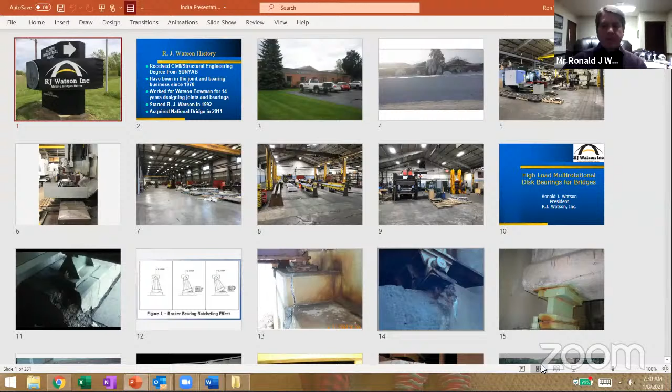Okay, there will be some initial formalities. We have academicians also with us. Here we have Professor Jyoti Busari, head of the Department of Civil Engineering in a college in Western India. Hello, hello.

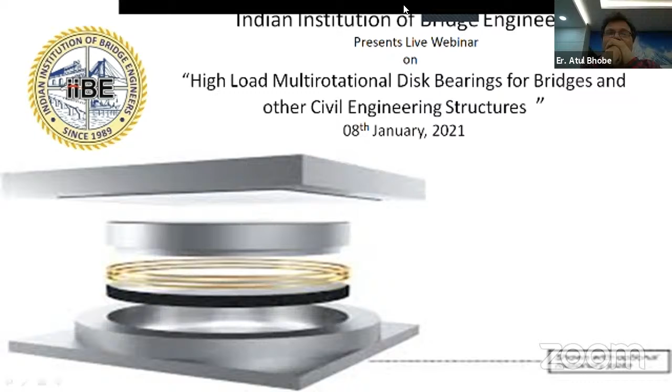Okay, well thank you very much. I appreciate the opportunity to talk to you today from Buffalo, New York, where it's early morning, and I also appreciate you staying to hear me this Friday evening. So it's a great thing.

A little bit of background: we got an upper bearing plate, and then you have a mirror finished stainless steel top plate that goes on top. So now you have a bearing that can move in any direction and also rotate in any direction. Dimpling is sometimes used - we'll use dimples and grease to reduce the friction even further, but not everybody uses dimpled and lubricated Teflon. It's kind of a mixed bag in the USA.

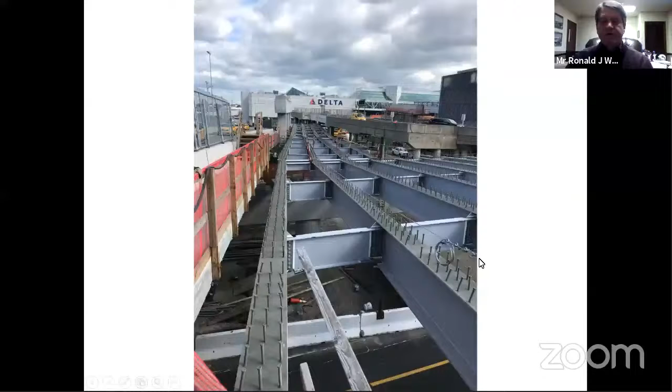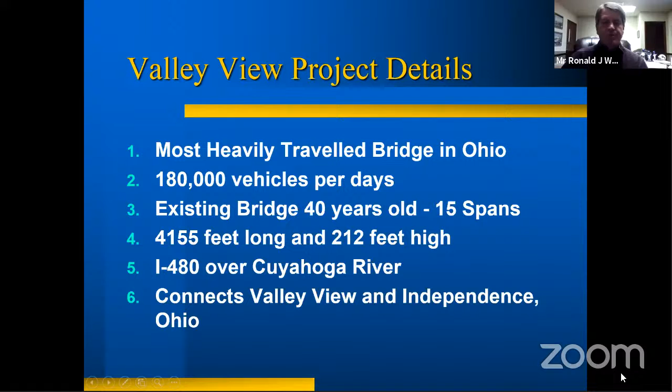This is a project in Ohio called the Valley View Bridge. It's an interesting project in that it's the most heavily traveled bridge in Ohio, getting 180,000 vehicles a day. The existing bridge is about 40 years old, actually in pretty good shape, but it's overworked with too many cars.

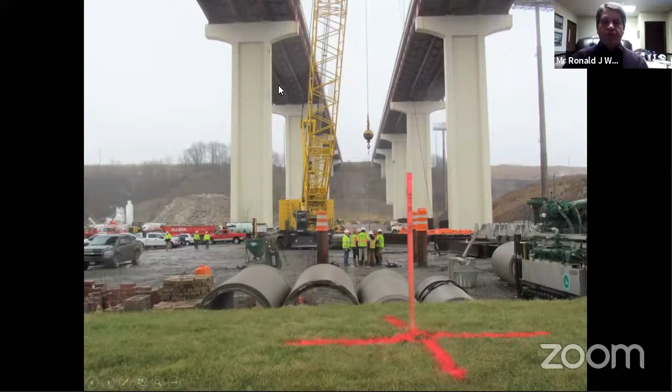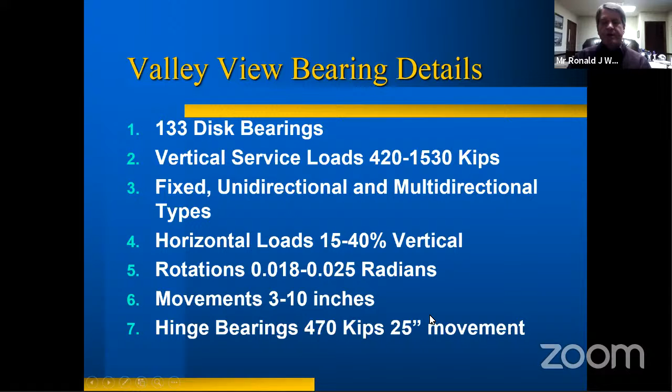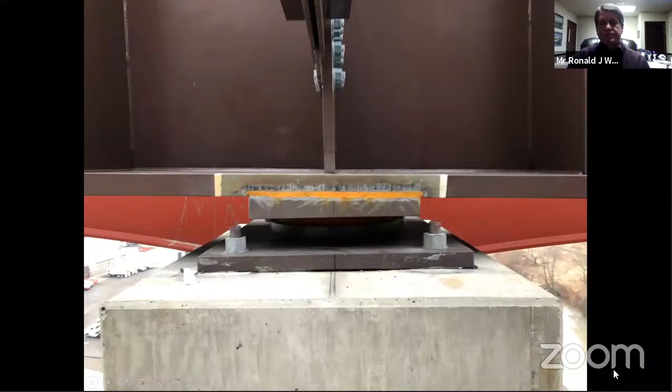So there's one of the finished installations of the bearings. We typically put an information plate on each bearing with the company name, date of manufacture, name of the bridge, and location. All the critical information is on these plates, so if you come back 10 years later doing an inspection, you can see all the critical information.

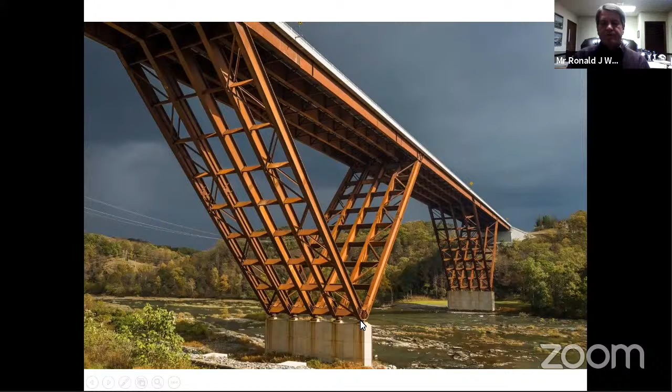They're set up on shims, in this case nuts, and then they'll grout that into place, and then their bearings are fully assembled. So for inspection it's actually quite easy, you just take a ladder, get up and look at the bearings during your biennial inspections.

Steel boxes use a lot of disc bearings. Here's a steel box bridge in Orlando, Florida, and there you can see a couple of the disc bearings supporting those steel boxes. There's another steel box application.

This is what they call a diverging diamond interchange, the latest thinking on keeping traffic flow going from divided highways, exit and on ramps. They use these diverging diamonds, which are quite popular now. These are steel boxes too.

It's interesting here when you look at this box supported by two bearings, this box supported by two bearings, and this one only has one. The engineering behind that was carefully worked out, but they determined only one bearing was needed for the interior box.

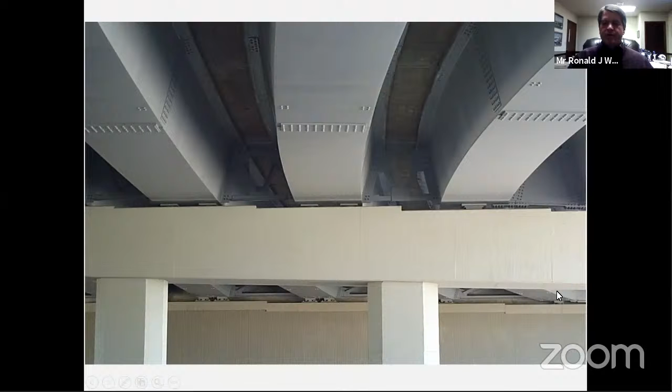Steel arches: this is a bridge in Portland, Oregon, the Sellwood Bridge, that utilized disc bearings. A little shout out to the iron workers who built this bridge.

So there's one of the bearings at the abutments, one of the disc bearings. You can see the load element. Looks like it might be a slide bearing as well.

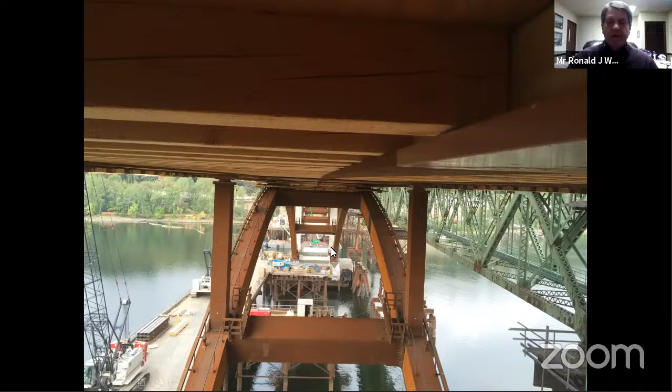Also bearings on top of the spandrel columns there. But then this bridge also had bearings between the edge of the arch rib and the shear blocks, so these are lateral bearings.

I know we're talking about using some of those on a project in India as well. There you can see a disc bearing used in the lateral direction. Interesting with this type of bearing, the load may not be on it full time; it's a design where maybe it's only loaded during wind or seismic conditions.

One of the nice features of the disc bearing is it can accommodate rotations at low or even zero load. There's no minimum load required for that bearing to accommodate rotation.

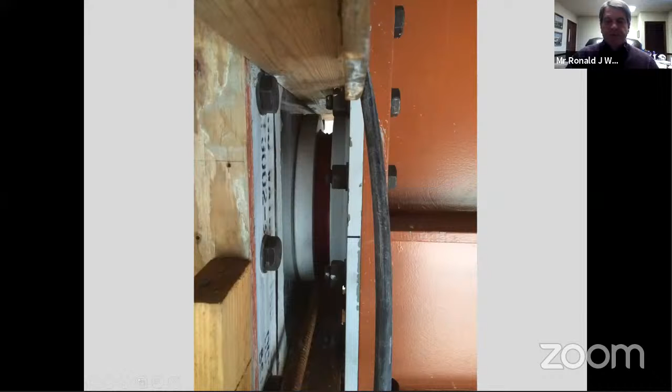This is a bridge in Arkansas, the Broadway Bridge, that sits on disc bearings. But there's also another interesting application of disc bearings on this bridge: these are the temporary struts that hold up the arch rib, and the base of that temporary strut has a little disc bearing to accommodate the rotations during the erection of the arch rib. They painted it white, so you can't really see the red disc there, but it's right there.

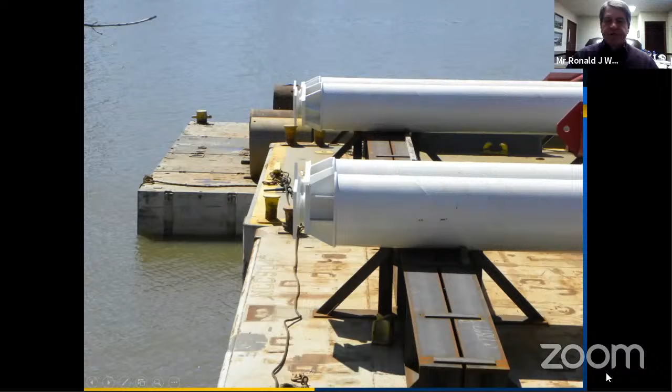This is just kind of a cool picture. It's the Rio Grande River Gorge Bridge in New Mexico, and they retrofitted the old roller bearings a few years ago with disc bearings. We also worked on the Hoover Dam project.

This isn't too far from Las Vegas. 24 disc bearings on this. This is a North American record for a concrete arch, around 320 meters span. The bearings are on top of the columns supporting the deck. Now these tall columns, some of them were like 100 meters tall, those were integral. But the shorter columns have bearings underneath, also bearings at the abutment. That's actually the rendering of the bridge. The renderings are so good now, it's hard to tell them from the real structures.

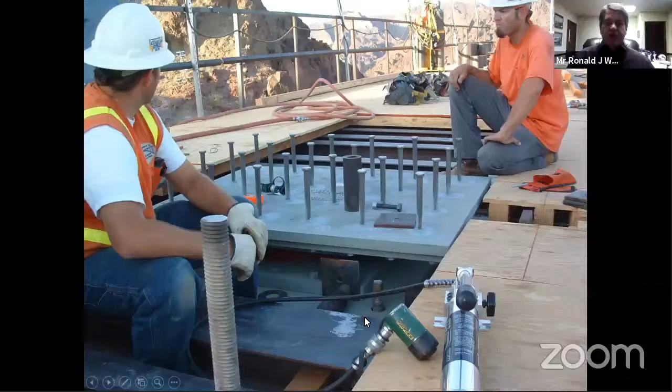Here you can see one of the bearings for the Hoover Dam project. Most of the specifications we deal with today require that the bearing have a replaceability scheme designed into it, so should something ever go wrong, you can get at it and remove it. In this case, you have a cast-in upper plate, but the upper bearing plate is bolted into that - there you can see the bolts. Similarly, the masonry plate was grouted in, but the lower bearing plate is bolted into that. So to facilitate removal, you would jack the structure, draw those bolts out, and you can actually pull the bearing out in one piece.

So that's about 300 meters over the river, which is normally a little higher than I like to go when I'm looking at bearings. A lot of these bearings are big bearings, but they're also slide bearings, so they can actually move around on you during installation, and that's not what you want to happen. So in many cases, we'll put some external angles on like this, which essentially holds the plates together. They're slotted, so you can adjust it for temperature setting. Once the final connections are made, then you would take that hardware off.

So that's the real bridge once it was completed. It's kind of an interesting structure, certainly a famous site with the Hoover Dam in the background. But if you ever go to Las Vegas, that's a good bridge to take a look at.

Cable Stay Bridge over the Willamette River in Portland, Oregon, that sits on disc bearings. Here you can see one of the disc bearings for that.

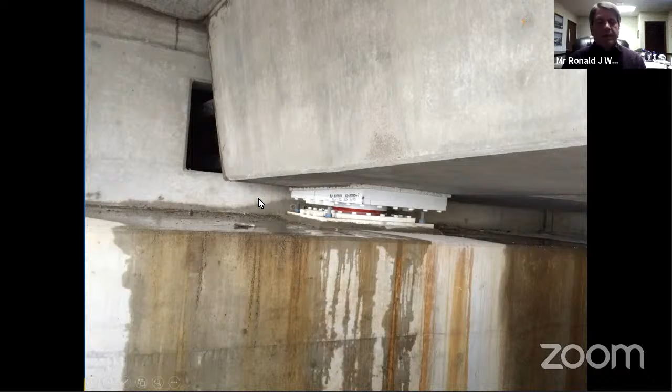This is a good picture just to emphasize a point. People often ask me, how long do these bearings last? And really, they should last the life of the structure. But what we see in the field many times is deck drainage pouring down on the bearings, and oftentimes that deck drainage, especially up in the northern states, has de-icing salts in it, which corrodes the plates. So long term, I'm not worried about the polyurethane pad, but it's the plates that can start to prematurely corrode. Now, in this case, they had not installed the joint yet, so that's why it was leaking like that. Once the joint was installed, that stopped. But in many cases, you go out and look at older bridges, you see deck drainage pouring down on the bearings. So that's something you need to deal with.

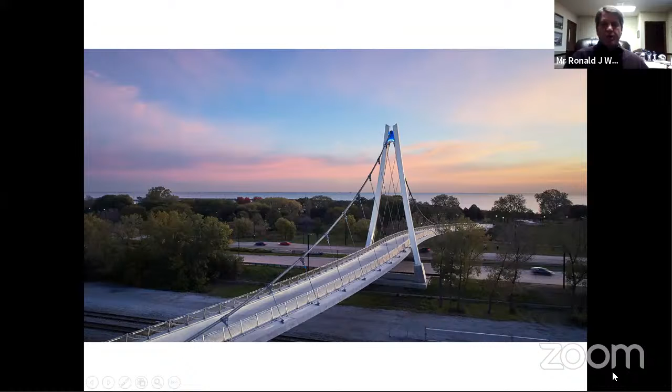A lot of pedestrian bridges use disc bearings. This is an interesting pedestrian bridge in Ohio, a cable stay bridge, and had our disc bearings also designed for uplift, which I'll talk about in a minute. This is a pedestrian bridge in Chicago, also had some uplift bearings. This is actually a bridge built for horses to cross the LA River in Los Angeles, an equestrian bridge - I haven't done too many of those. And then also another pedestrian bridge in Dallas. Pedestrian bridges are quite interesting.

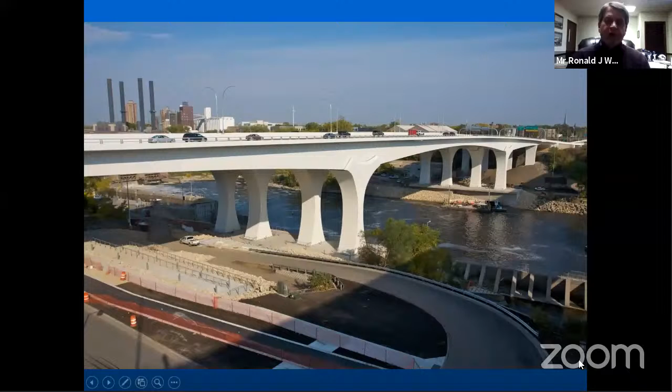This is a new bridge in Minneapolis to replace the one that collapsed, the I-35W bridge. 54 disc bearings on this concrete segmental bridge.

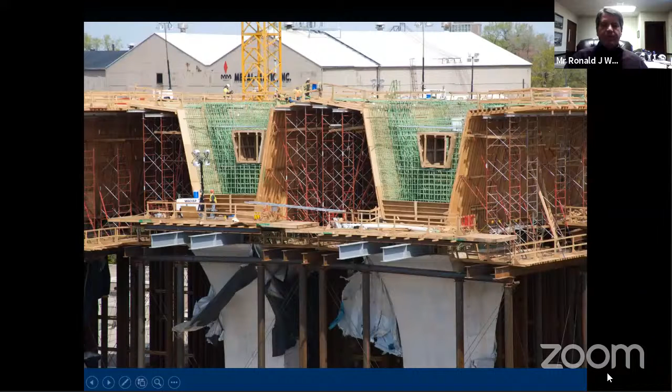It looks integral there, but there's actually a gap right here where the disc bearings are located. Some of the bearings on that were designed for 25,000 kilonewton capacity, so that's a disc for a 25,000 kilonewton load. That's the main pier where the big bearings were located. And again, here you can see that replaceability detail - bolted, accessible connections, allowing the bearing to be removed.

I often consider that a new bridge, but it's actually over 13 years old now. This was a retrofit we did - this is I-75 in Saginaw, Michigan. The original bearings were pot bearings, but they had problems with sealing ring failures on the pot bearings on this bridge, so we got the contract a few years ago to replace about 135 bearings. Some of those bearings were on the order of 35,000 kilonewton capacity, so there you can see quite a big disc bearing for that.

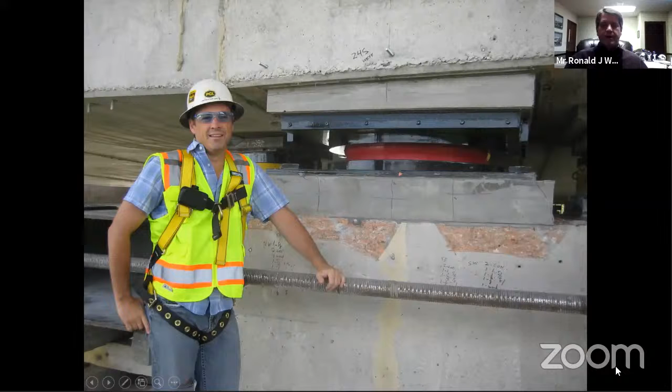Now these yellow things, you're probably wondering what those are - those are the temporary hold downs that hold the plates together. Once the final connections are made, then you take those off. The reason we paint them bright yellow is a reminder to do that. I remember I was out on a bridge once several years after the installation and the temporary hold downs were still on it, so we paint them bright yellow now as a reminder. So there you can see one of the bearings for that bridge in Michigan.

So this is an extradosed bridge. I know you have some extradosed bridges in India, but it's a cable supported bridge - instead of the big tall towers, you have the short squat towers. That's a cost effective design for certain span lengths, but it's a big, heavy concrete bridge.

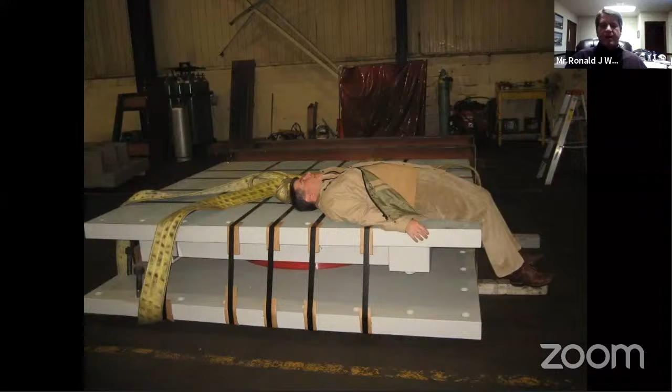Some of the bearings at the main pier were designed for 45,000 kilonewton load, which is about 1.5 meters diameter disc, maybe 200 millimeters thick - so that's a big disc. Fully assembled, each bearing weighed 21 tons. There's a picture of me laying on top of the bearing so you can see how big that bearing is. And here's a shot of us doing the installation - I was hoping all those anchor bolts lined up with those holes, which they actually did in that case.

Of course they wanted these bearings tested, and it was beyond our capacity, so we had to go to the facility at University of California at San Diego, where they have a big test frame. They can go up to maybe 60,000 kilonewtons vertical load on this machine. They have vertical actuators, horizontal actuators, and can do seismic testing. We actually tested some of our seismic isolation bearings on this facility as well too. So if you ever get to San Diego, that's a worthwhile stop. Here we are doing the testing on that big bridge in Connecticut.

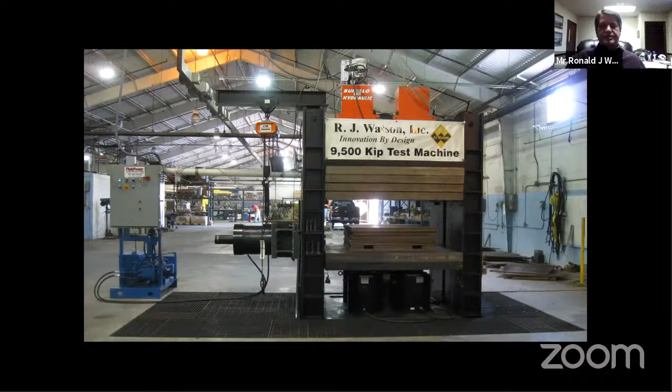Our testing capabilities are quite good - we can go up to about 40,000 kilonewtons vertical load on our big test frame. We have a horizontal actuator to do friction testing and horizontal load testing, so we keep this machine pretty busy. We have a large displacement actuator that can do plus or minus 650 millimeters of displacement, so if you're looking for some large displacement testing, we have that capability. Here's our large displacement test frame - you can see how that would operate.

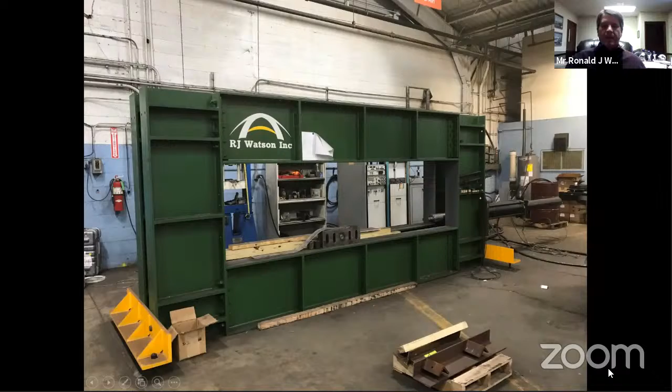And then a smaller test frame - this maybe goes up to on the order of 15,000 kilonewtons, somewhere in that range. Smaller bearings are tested on this as well too. We have extensive testing capabilities - we test other people's bearings, we test bearings for different industries as well too. So if you're looking for some high capacity testing, we have that capability as well too.

Uplift is something we see pop up quite a bit nowadays. Uplift is common in seismic zones because earthquakes don't just go back and forth, they go up and down as well. Sometimes on a curved girder, you might see an uplift reaction during certain conditions. But one that pops up quite a bit now is flood-prone regions - we saw that during some of our hurricanes in the south where sections of highways floated away. You don't think of bridges being buoyant, but they can be, so that's another application for uplift. We modify the SRM, or central pin, to make it almost like a trailer hitch on your automobile.

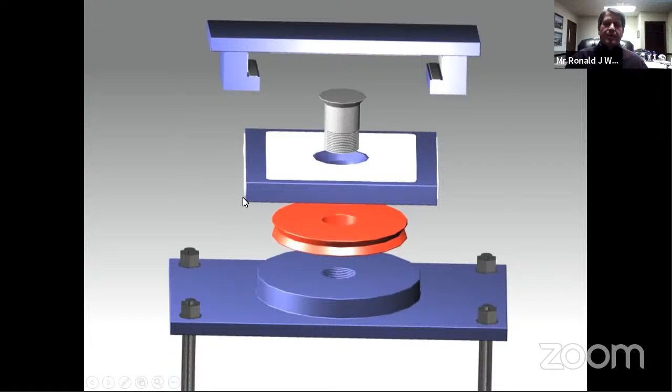It allows rotation but keeps the plates from pulling apart. We connect the upper and lower bearing plate through that. Then if you want movement, the guide bar would lip underneath the upper bearing plate. So fully assembled, this bearing looks like this. It can move and rotate and resist uplift. We do a lot of bridges, but actually buildings use uplift disc bearings as well too.

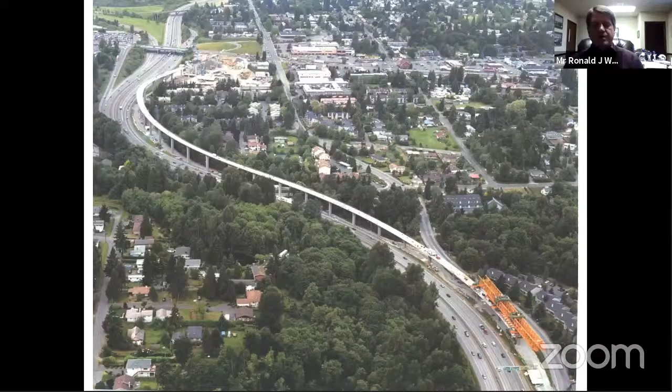This is a project in Seattle, part of their light rail system. We do a lot of light rail structures as well too. This is called Sound Transit near the airport, precast segmental design. Here you can see the uplift bearings for that project.

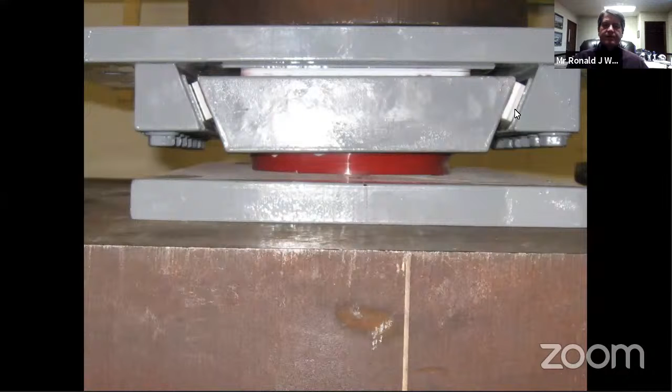Another project in New York City, this is a case where they were replacing old girders nights and weekends to keep the trains running during rush hour. There's a little hinge detail here. The problem is we had a very limited height to work with, so instead of the conventional guide bar underneath the upper bearing plate, we used a wedge plate detail like that. That enabled us to achieve uplift in a much lower profile. So we do a lot of specialty designs like this.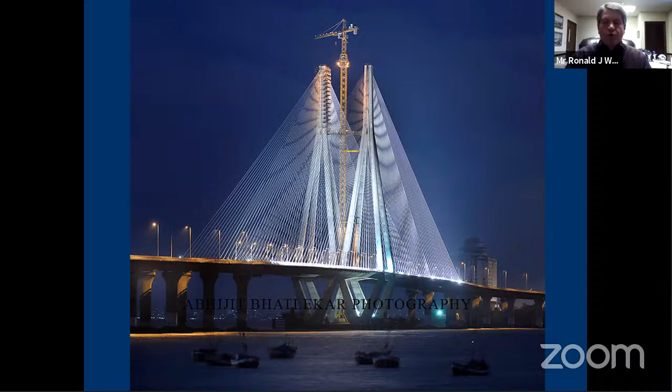Of course, we've done a lot of international projects, especially some in India as well too. This is the Bandra-Worli Sea Link Bridge in Mumbai, and disc bearings were used on that project. There's a picture of the bearing with the protective coating on it in the shop, in Metco's shop. There's a picture, you can see the big concrete segment being supported by disc bearings on that. So that was a fun project to work on.

Also, the second Vivekananda Bridge - this is an extradosed bridge, we talked about that a little earlier, again cable supported with short towers. So that had disc bearings on it, and Atish was kind enough to send me this picture. He reported that they've done recent inspections and the disc bearings are performing well.

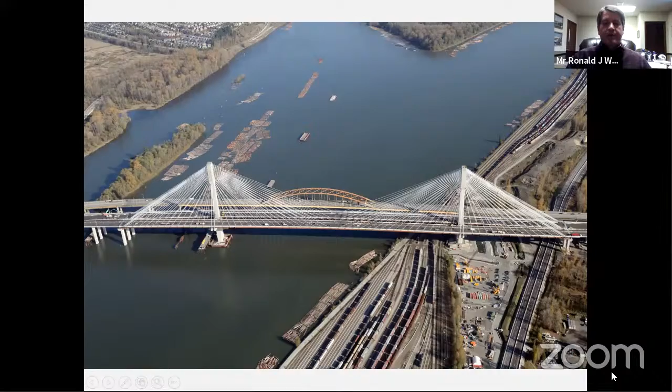This is another project up in Canada - the Port Mann Bridge, cable stay bridge in Vancouver, BC, Canada. And there you can see one of the disc bearings for that. Now, in addition to the vertical bearings, we also had some lateral bearings on this one, between the deck and the tower. There you can see the lateral bearing. Again, like that bridge in Oregon, it's only temporarily loaded at times, maybe during wind or seismic, so disc bearings work good in that configuration.

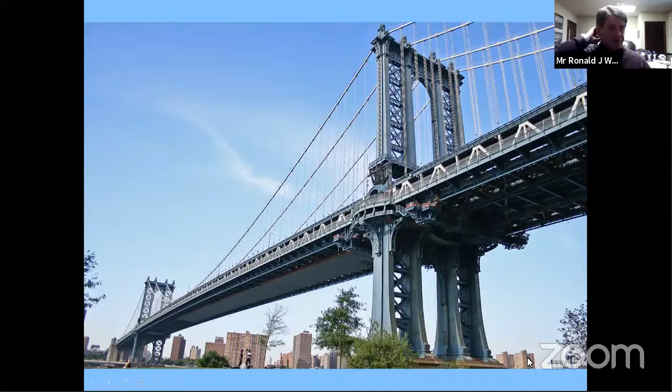A lot of retrofits too. This is the Manhattan Bridge in New York City, over 100 years old. Here you can see the old rocker bearing nest, as they call it, because you're putting rockers together. You can see where the bolt sheared off of the last rocker, so it's fallen apart. So we got the contract to replace those with disc bearings. Here you can see the disc bearing design that we came up with. It's interesting, it's a common masonry plate for two separate discs. So that was what we engineered to replace those old rocker bearings.

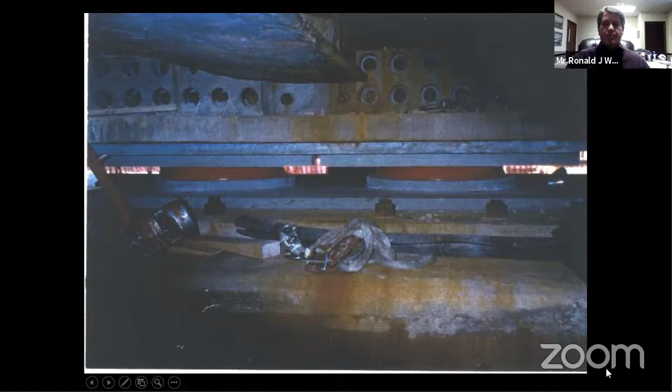There's another bridge in New York City, Cable Stay Bridge - Goethals Bridge is the name of this one. Here you can see the bearings in the shop with the beveled upper plate to accommodate the grade of the structure. And there you can see them installed. Stainless steel hardware, that's common now, because a lot of times those bolted connections could rust.

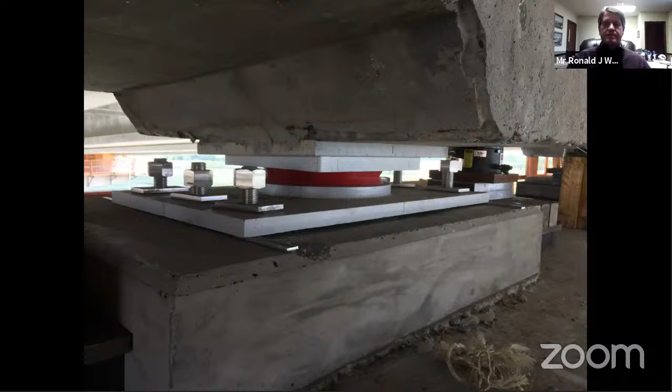With stainless steel, you're providing something that'll last a little bit longer. This is in the Outer Banks of North Carolina, the Bonner Bridge segmental design.

Here you can see the disc bearings. Again, those are the temporary hold downs that we paint bright yellow as a reminder to remove them later on. Kind of a nice picture, sunrise over the bay there, over the segmental project.

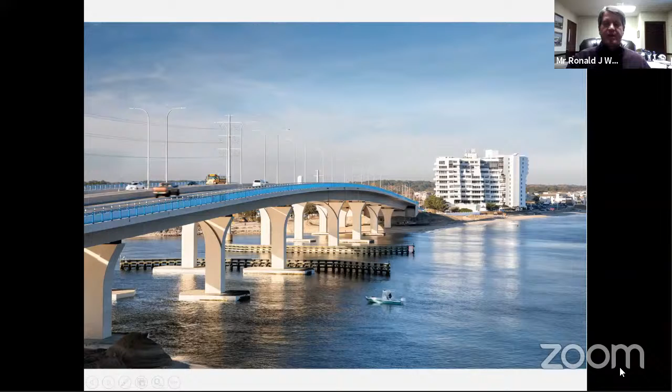Another segmental project in Virginia Beach, Virginia, that utilized disc bearings. Here you can see some of the disc bearings sitting on the pier waiting for the segments to be dropped on top of them. We also do some specialty high rotation bearings.

This is kind of a design we came up with several years ago. It's designed for extreme rotations, up to 8% rotation. We utilize this design for that. It's not unlike a pot bearing. You have a cavity here, you drop the disc in, and then you load it. You don't have to put sealing rings in there because you're not overstressing the elastomer. But we're using the outer wall of that pot to accommodate high rotation, also high horizontal forces.

Sometimes we use these for that, so that's our pot disc bearing that we designed for that application. A bridge that utilizes these is this bridge, that Cable Stay Bridge in Dallas, Texas. It's a Calatrava design, he's a famous architect, over the Trinity River.

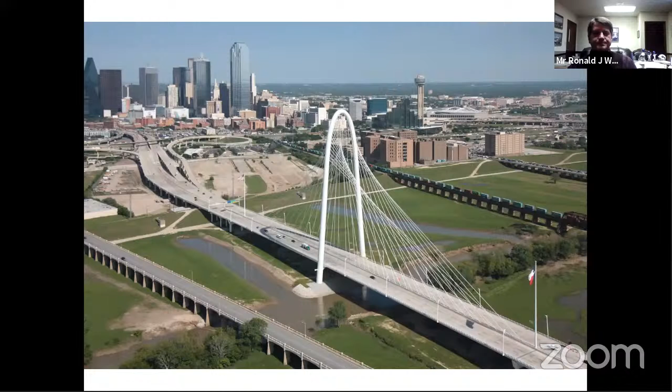There you can see the requirements for high rotation. The bevel goes lateral in this way, and you can see why, because the load beam is beveled as well. So that was the reason for the bevel going lateral on that project. There you can see the loaded bearing.

Just kind of a cool project. This is up in Vermont, I-91 in Brattleboro. Precast segmental design, but little fancy work on the substructure piers. Kind of a nice way to jazz up a bridge. There you can see one of the bearings for the Brattleboro project.

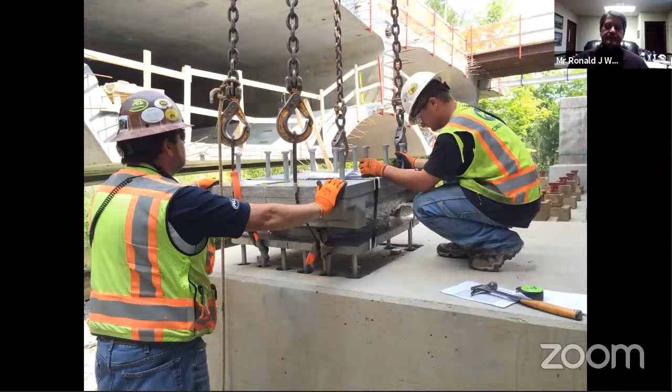Curved girders create problems for engineers, especially with guide bar alignment. If you go by the rule book, you go from your fixed point to your expansion point, and you draw a chord. But I mean, who's to say that's the way the bridge really wants to move? So curved girders create a lot of problems for that.

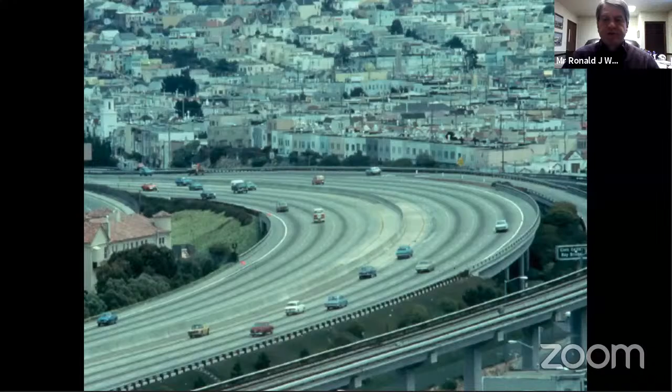One of my favorite curved girder bridges is this one. This is actually a ramp to a suspension bridge in San Francisco. But can you imagine trying to line guide bars on something like that? Guide bar alignment is an issue. I've seen guide bars shear off. This one looks like it's about to shear off, as you can see there.

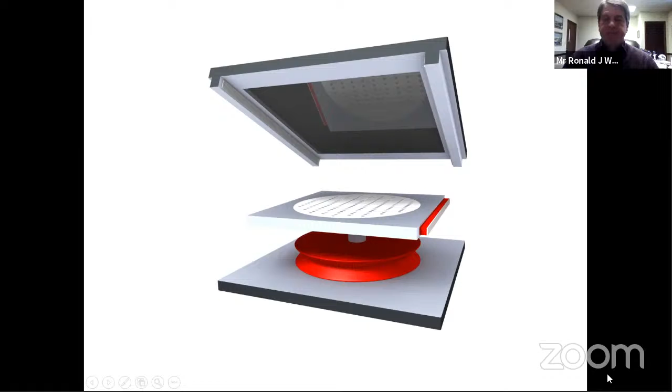So where there's uncertainty about direction of motion, what we can do is put some of the polyurethane pad on the guide bar, so it's on both sides. So what that gives you is a tight fitting bearing, but it gives you some lateral play in either direction. That's what we call flexible guiding. So here you can see a flexible guided bearing, which also has uplift restraint designed into it as well.

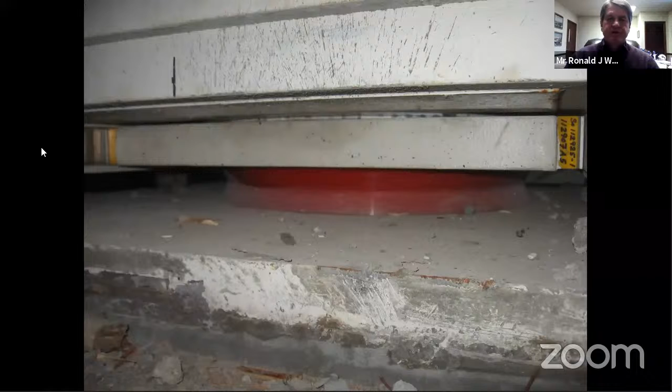This is a project in West Virginia that utilized some of our flexible guided bearings. You can see the approach to this bridge on one side has a sharp curve, so they opted to use flexible guided bearings at the expansion piers. Here you can see we colored the polyurethane a little different color since it's a slightly different material than the actual load element.

We do a lot of light rail projects, as I mentioned before. This is the Metro project we did in DC, Washington, DC. It's called the Silver Line. It goes out to Dulles Airport, which is on the western side of Washington, DC. Again, precast segmental design. Now, they had issues with elastomeric bearings and also pot bearings on previous Metro projects.

So they decided they wanted to use disc bearings on this segment here. It's elevated in many portions of the line that runs, it's 20 some miles. And there you can see some of the disc bearings supporting those segments. So they're not really big bearings, but I think we totaled about 2,000 bearings for that particular project.

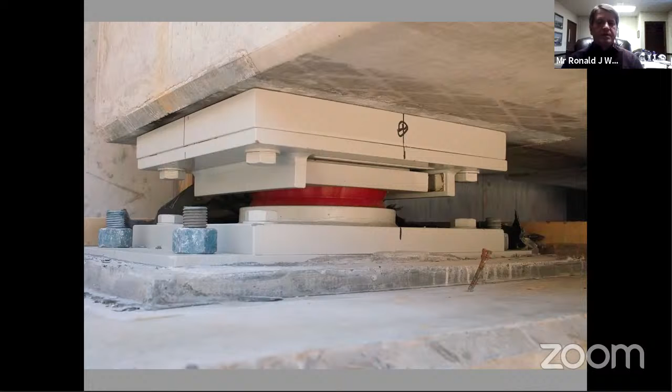Here's another light rail project, down in San Diego, California. Steel plate girders, again with a replaceability detail. The disc is sitting in a recessed plate, and there's an extra sole plate welded to the girder. For removal of the bearing, you draw those bolts out, jack it up a little bit, and you can pull it out.

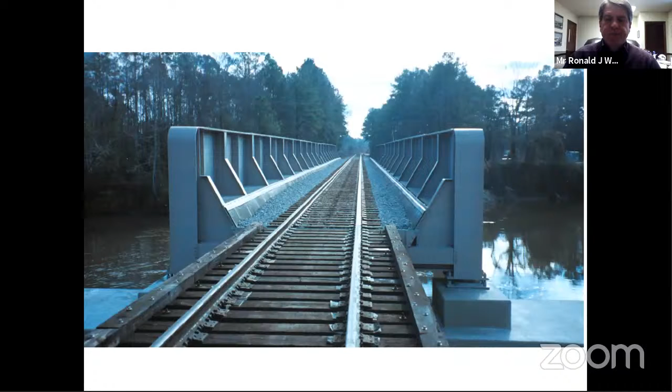Class 1 are the heavy rails. They use a lot of disc bearings. Here you can see a bridge in North Carolina sitting on our disc bearings.

For railroad structures there's a different specification. For highway bridges we use AASHTO, and for rail bridges we use AREMA, which has its own disc bearing specification. Again, for the heavy rails, they don't allow pot bearings.

This is a bridge over the Ohio River that we worked on with Norfolk Southern Railroad. The central span was designed to be a swing span. This bridge was over 100 years old, and I think they swung it open once or twice after they built it, but never again. So they decided to replace the beveled swing bearings. The way that worked is you'd pull that plate out and it would allow the structure to rotate. But since they hadn't done it in so long, they decided to replace them with permanent bearings. So there's the disc bearing installed in place of that wedge plate bearing.

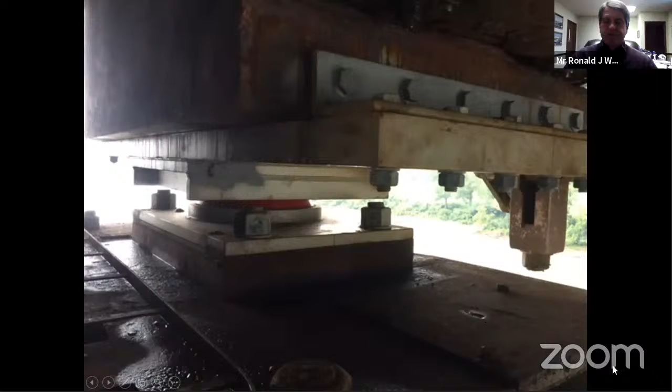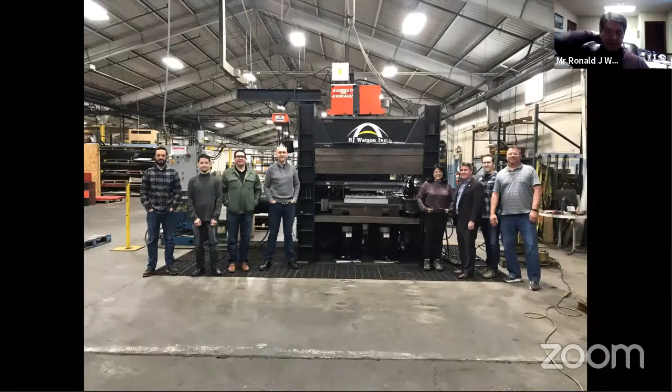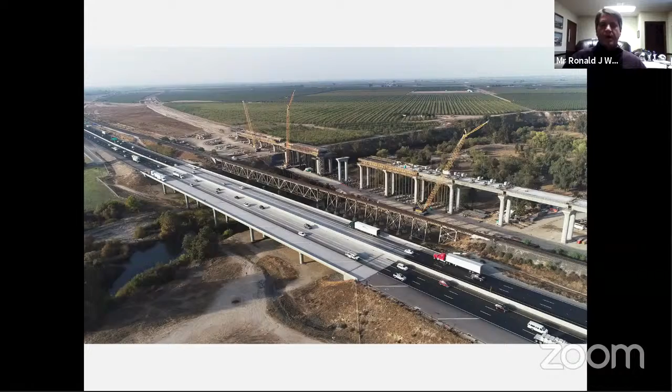Another project in Washington, D.C. - this is a rendering of the Frederick Douglass Bridge. This bridge has some very large displacement bearings; you can see the slide plate on that. There's some construction photos, so that project's moving along. That was from the summer.

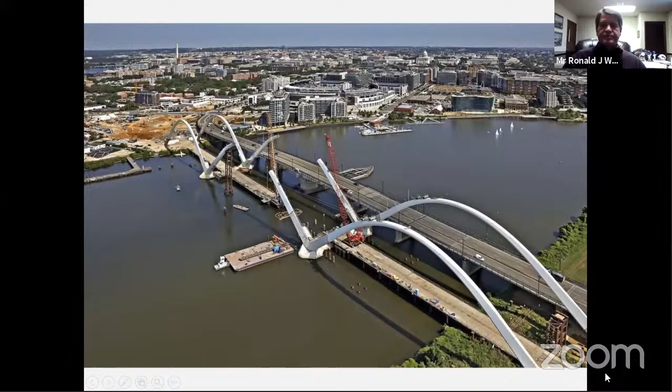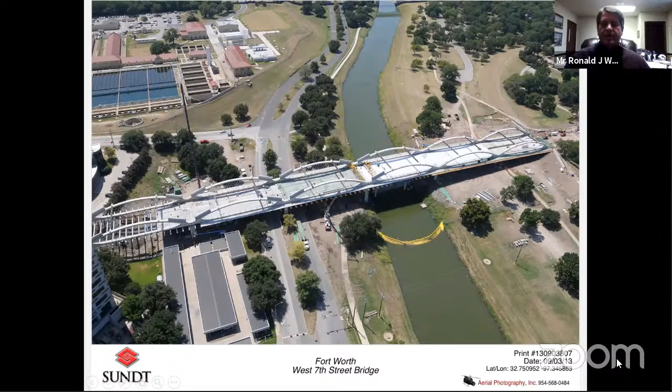So this is a project we did in Texas several years ago, in the Fort Worth area. They had arch segments that were dropped down onto the bearing. During one of the installations where they were lowering the segment onto the bearing, there was an accident where the crane tipped over. So what ended up happening to the bearing is all the load was on one edge of the disc. You can see, it's hard to see in that photo, but the entire load of the structure was on one edge of the disc. So obviously that disc was overloaded in that particular instance.

The contractor called and said, hey, I think we're going to have to replace some of these bearings. I said, well, jack it back and take a look and we'll see what happens. When they jacked the structure back, there was no damage at all to the disc. So that's an example of an overload application with absolutely no damage to the disc. That's common, especially during girder erection, where you'll get overloads and over-rotations. Again, the polyurethane pad has tremendous capabilities for that.

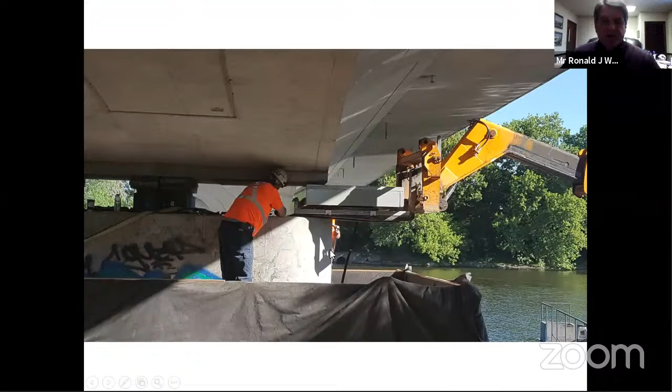This was a project up in Canada. We installed some bearings back in the 80s. Several years later, they upped their seismic criteria, so all of a sudden the old bearings didn't meet the new spec. There was nothing wrong with the bearings, but they decided to replace them to get up to spec. So I said to the contractor, give me some of those discs, because they'd been in service for 32 years. We got the discs, pulled them out, and they looked fine. There wasn't a mark on them - they were really in excellent condition.

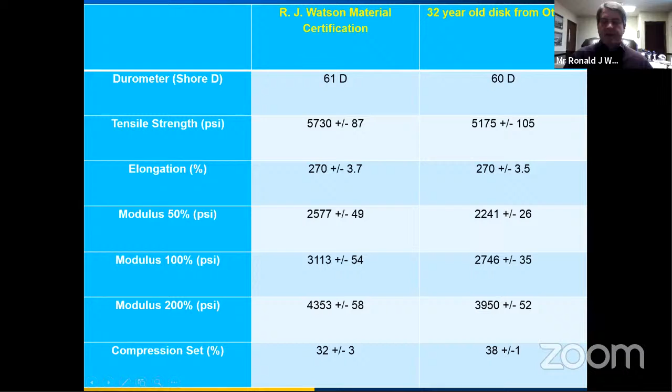So what we did is take one of the discs, cut up some tensile strips and compression buttons, and ran physical property testing on the 32-year-old material. On the left column here, you can see a compilation of tests we ran on brand new discs, and on the right a compilation of tests on the 32-year-old material. There was a little bit of degradation in tensile strength, elongation was about the same, and a little bit higher compression set. But the column on the right still meets the specifications. So I could take those 32-year-old discs and supply them for a new project and they wouldn't be able to say no. Not that we would do that, but it gives you a good feel for the long-term performance of that polyurethane load element.

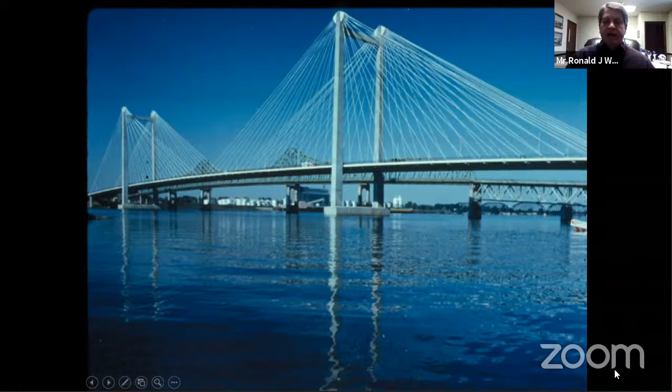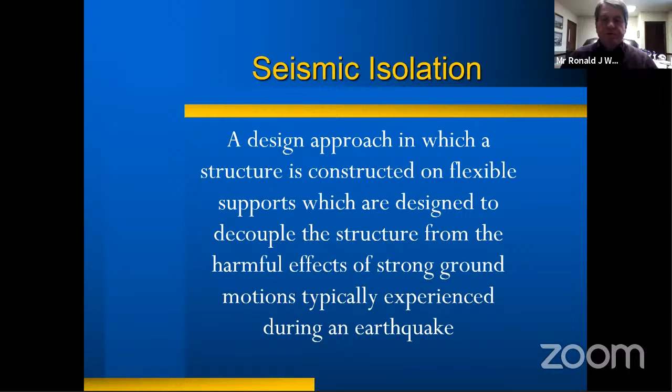The other thing we're active in is the earthquake market. One of the ways of dealing with seismic forces is to isolate the structure. Seismic isolation is quite popular in many regions. In the U.S., there are actually quite a few seismic zones, not just the West Coast.

One of the more popular seismic isolation bearings is the lead rubber bearing. So you have a conventional elastomeric bearing, and then you have a lead core. As it cycles, the lead core shears and dissipates energy. But some of the concerns with lead core bearings is what happens after an event.

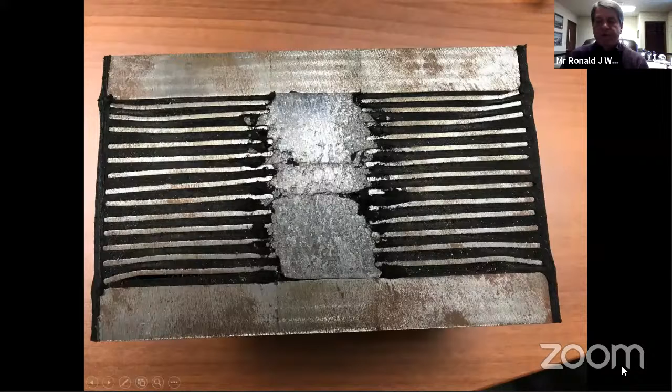I was over at the Earthquake Center at University of Buffalo, and they did some routine testing on lead rubber bearings, then cut them open after testing. So that's what it looks like after testing - not a solid piece of lead anymore, some internal damage to the plates. So there's some concern you may have to replace these after an event.

With that in mind, the disc bearing can be modified for isolation as well. Thicken up the upper bearing plate, outfit the perimeter with springs. The springs are actually made out of polyurethane, which is used for springs in a lot of industrial applications. So what you have is a multi-directional bearing with a built-in restoring force through the use of these springs.

The damping or energy dissipation comes from the sliding material. Teflon at thermal speeds is around 2% mated up against stainless steel. But if you speed it up, the friction goes up with velocity, so that kind of works with you. The higher the friction, the more damping you get.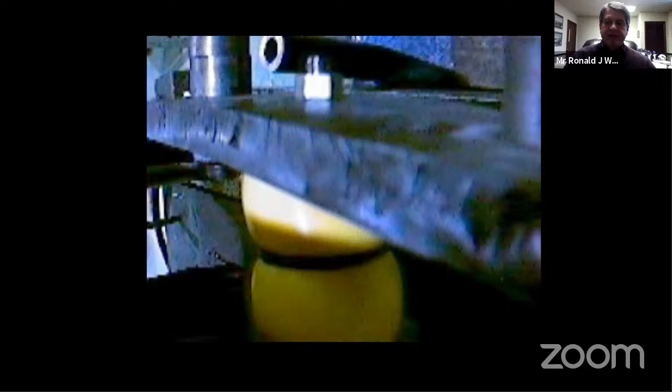This is compression testing we ran on the springs. When you look at the sample of that spring, it doesn't look like it would have that capability, but as long as you stay in the elastic range of the material, you can do that all day long - there's no real fatigue or stress on the components. So not only would it have to compress, but it would also have to slide at the same time. This is representative of the type of reaction it might see during a seismic event: compression, relaxation, sliding, all at the same time.

We're fortunate actually where we're located, not too far from the Earthquake Center at University of Buffalo. They have seismic simulators and shake tables and all sorts of equipment that you can test your concept on. Many years ago, we tested this concept out - these are the bearings at the corners of a plate girder bridge, and those are lead bricks to simulate the dead load. We cycled the bearings through 50 different earthquakes.

We got good force reductions, manageable displacements, and it came back to within a couple millimeters of its original position in all the testing that we ran. So good restoration force capability as well.

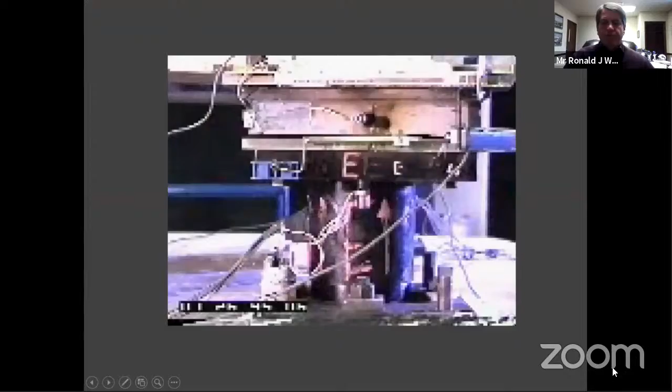So after the 50 earthquakes, we just flipped the machine on and shook it for a while. I apologize for the quality of this video, but it was taken many years ago. Those are the yellow springs that are shoving that bridge back and forth. This is more like a durability test - we're just shaking the table and testing the bearings.

So after 50 earthquakes and then the durability test, the bearings were still functional. You can see the springs are kind of small - it was scaled down for that application. After 50 earthquakes, the bearings still work, and that's important because earthquakes don't come as one event. There's precursors, there's aftershocks - they have to work over and over again.

So this is our test frame we built and donated to the University of Buffalo. This is where we do our high-speed or dynamic testing. We have a working relationship with them where if we need to do some testing, we can just go over and do it.

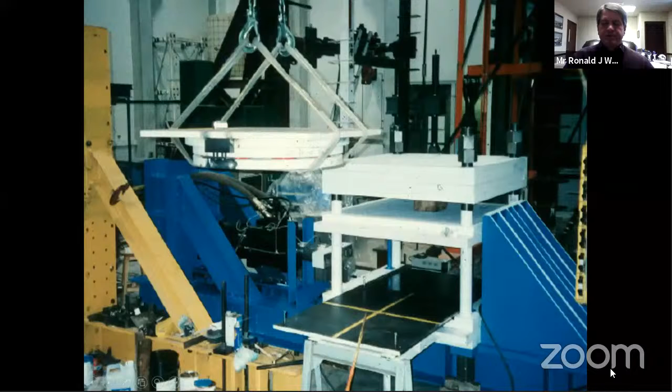Lots of different projects. As I mentioned earlier, we always think of California when we think of earthquakes, but I think it's like 39 out of 50 states have seismic issues. So New York City - there's historical data that suggests there's been major earthquakes in the New York City area, so that's obviously an area of concern as well.

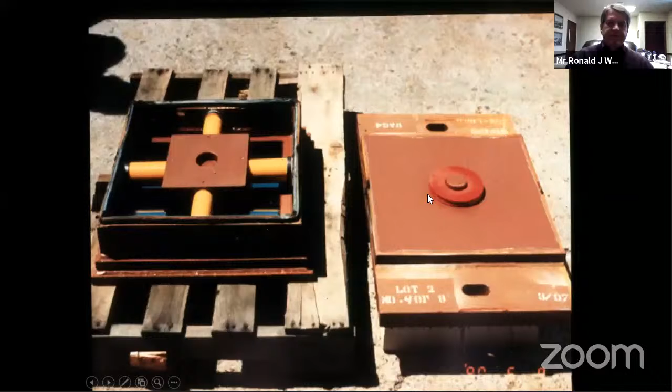So this is JFK Airport, Terminal 4 - this is the International Arrivals Building. If you fly from Mumbai or Delhi to New York City, you'll come in at Terminal 4. This is the ramps leading in and out of the terminal. We use isolation bearings here - here you can see the spring design on this one, that fits over the disc on top. So fully assembled, that's what they look like and installed.

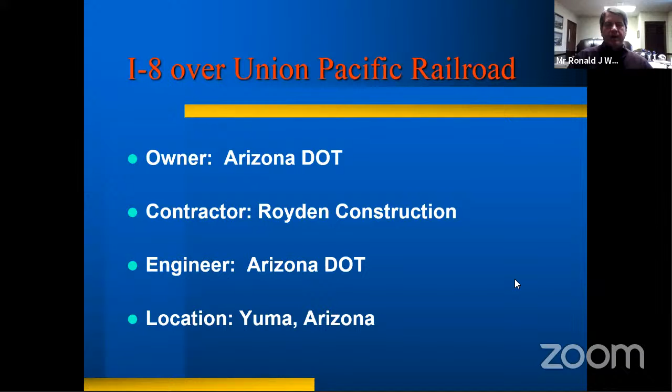This is a project on the California border. This is a high seismic zone, Arizona project. It's in Yuma. Now, this isn't a fancy bridge, but that's a lifeline structure, so it needs to be functional after the earthquake. It has to carry emergency vehicles over the railroad tracks. So the existing bearings look like that. Now, you don't need to be a seismic expert, but look at that bearing, picture some ground motion. You might have a problem with that design.

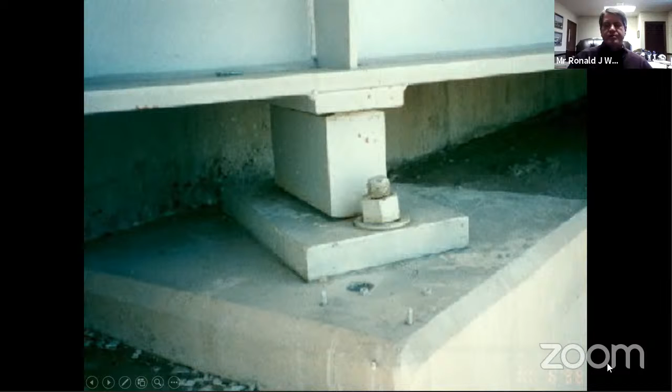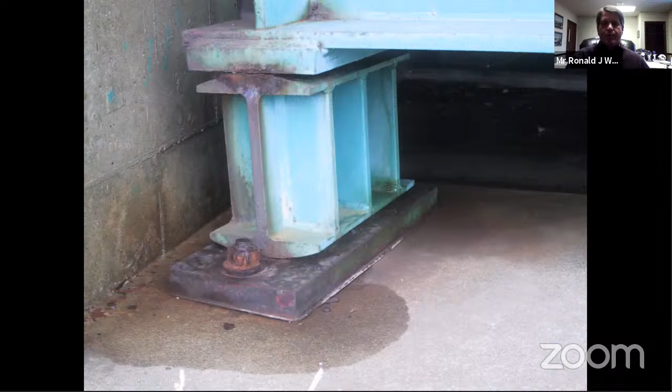This is a project down in southern Illinois. Again, the same type of deal. The existing bearings look like that. We replaced them with sliding isolation bearings. That project had 481 bearings, so that was a big project. There you can see the new isolator that we installed.

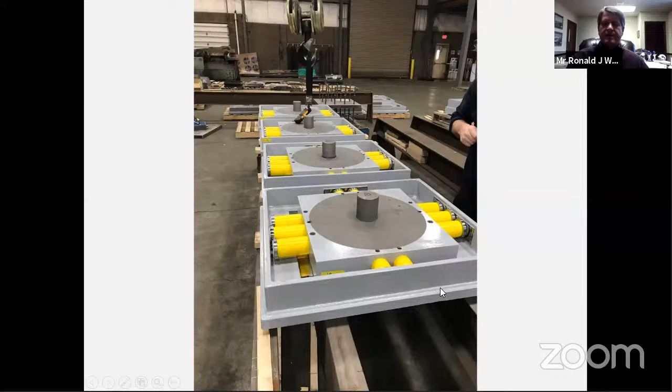The springs are preloaded into the block. This is our rig that we use to preload the springs. It's got a 40-ton jack. We compress it down, and then you put in set screws that hold it into place. Once it's completely compressed, then you drop it into that box. Then you loosen the set screws on that. So that's how it's configured into that plate.

This is a project in Ottawa, Ontario, a kind of nice looking bridge that utilized our sliding isolation bearings. Also, they had uplift restraints, so now you're adding a different feature to the isolators. You want to resist uplift forces as well, but that can be done with this type of design.

My favorite project we did is, of course, in Kolkata. This is the Atmosphere Condominium project, and it's a sky bridge connecting the two condo towers. The sky bridge, if you look, is actually 3 or 4 stories thick. There's a health club, nightclub, pool, trees, all on the sky bridge itself. So there's only 4 bearings, but they were massive.

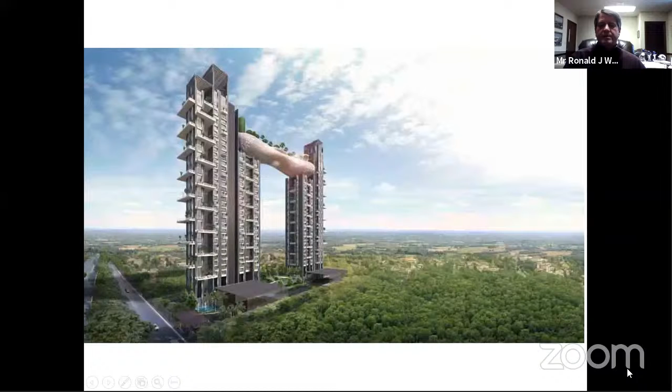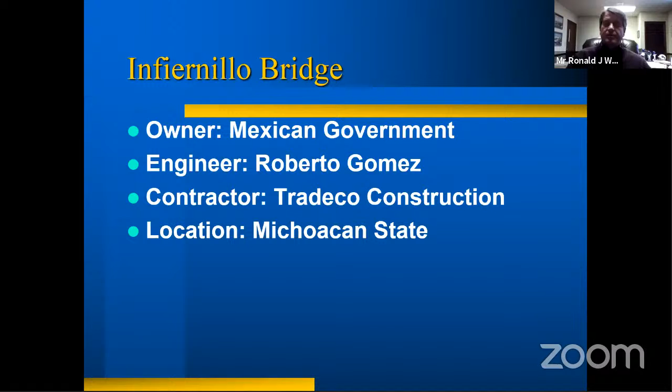So they lifted the trusses with the pier, and then they put these corbels underneath the trusses once it was lifted into place. So again, this went through a fairly significant seismic event. It worked well. I think in reality, what we do to these things in the lab probably exceeds what they'll even see during a seismic event. But it's nice to know that they work during a real earthquake as well.

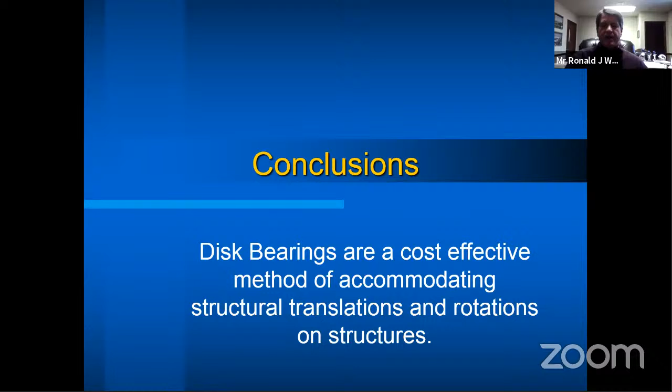So that concludes a couple quick conclusions. The disc bearings are a cost-effective method of accommodating translations and rotations on structures. Field inspections show that they'll provide long-term maintenance-free performance. My cautionary note is always deck drainage - keep the deck drainage off the bearings. And then they can be easily modified for uplift, high horizontal force, isolation.

We offer a no-cost or obligation design service. So if you have a project in mind, you want to take a look at these devices, we can put together some details for you to look at.

One last thing too - we've had other manufacturers be critical of the disc bearing. They say the resistance to rotation is too high. It's higher than a spherical bearing, but still quite low, comparable to that of a pot bearing. We haven't had any issues with edge pressure on the PTFE or the sliding materials, which is another claim that other manufacturers made.

Another claim is that you can't inspect the central SRM or pin and that it could corrode, but it's actually sealed in there pretty good. And we've taken bearings apart that have been in service for many years, and there was no real corrosion on that central pin. In all my years in this business, over 40 years, I've never seen a failure of one of those central pins on a disc bearing. So it's a good design there.

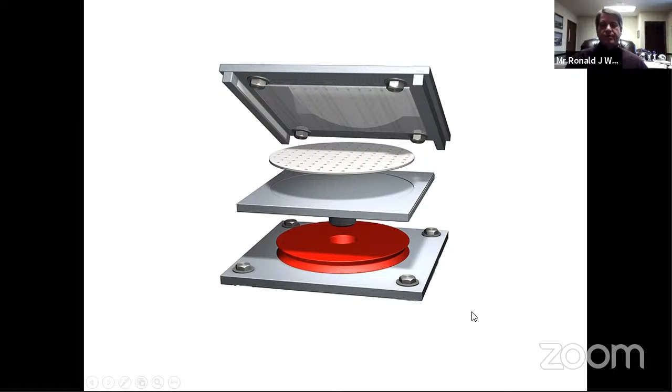Lastly, I've heard other manufacturers say the disc bearings aren't allowed in Europe. Well, that's not really true - there are just no disc bearing manufacturers in Europe, so nobody's promoting it. As a result, they don't have a spec for disc bearings in the European codes. So those are a couple myths I'd like to dispel as well.

We also have a marketing alliance with a company called BDI. If you're looking to monitor a bearing to get the actual loads, movements, and rotation, we can equip the bearings with monitoring capabilities. We've got a project right now in India we're working on. And we also manufacture some joint sealing systems as well.